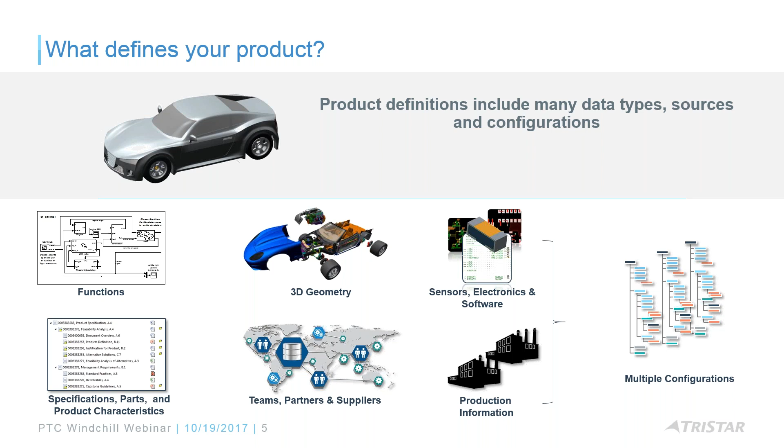So when we take a look at products, they may have also multiple configurations. A lot of companies want to design anywhere, manufacture anywhere, just to control costs, to control supply chain, and even time to market or just-in-time manufacturing. So keeping track of all this data, even in a globalized or dispersed environment, is becoming a challenge for a lot of companies. So a PDM would give you the ability to centralize the engineering data, but what about everything else within the company? There's sometimes no connection to any of that.

And who interacts with products, right? So typically it starts off with the upfront sales, quoting, and then gets more marketing, and then it gets passed down to engineering. And then other departments during that product development may need access to content that's being developed. Even the dispersed engineering organization with the various departmental stakeholders like quality, manufacturing, sourcing, and so on. So we're going to take a look at how PLM can help with supporting a lot of these different departmental stakeholders.

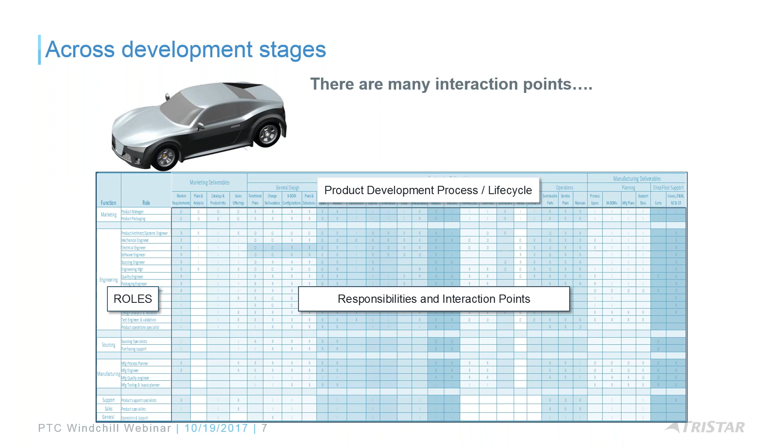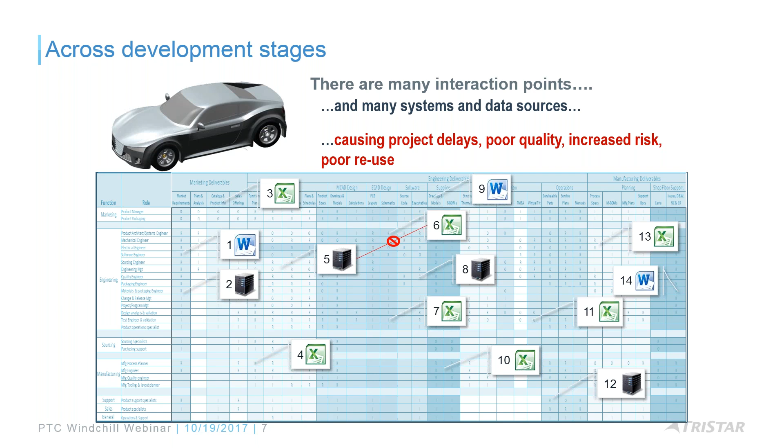There are many interaction points, many data sources that are then created. So each of these stakeholders typically may have their own database, their own work, and when a change comes, you need to examine that change, respond to the change, and incorporate that change into the product, or provide feedback back to the customer. Their disconnected systems ultimately cause project delays or poor quality or increased risk for meeting deadlines, and even poor reuse of existing data. There may be departments that already are aware of this issue, but it may never get back to that product design group in engineering, or it may not get in time to manufacturing, or even procurement.

One of the benefits of PLM is, because you're already creating a digital product definition in PDM or in your design software, the ability to enable universal data access to that information. That can happen in one system, but what data is being served? If it's just on a PDM, you're just serving the CAD drawing, the CAD part. That's pretty much it, maybe a limited view of the BOM.

And then everyone starts coming back to engineering asking for more information. So engineering is spending a lot of time being reactive to requests. If there could be a self-serve environment, engineering can spend more time on the design process, improving the design, cost optimizations, product improvements, and so on.

So at the end of the day, when I'm looking at a complete product, that consists of a bill of material, or what makes up that product, as well as the related information to each of those parts within that bill of material, or even the project itself. So things that may not come from engineering, like the quantities in inventory, or quantities that need on order.

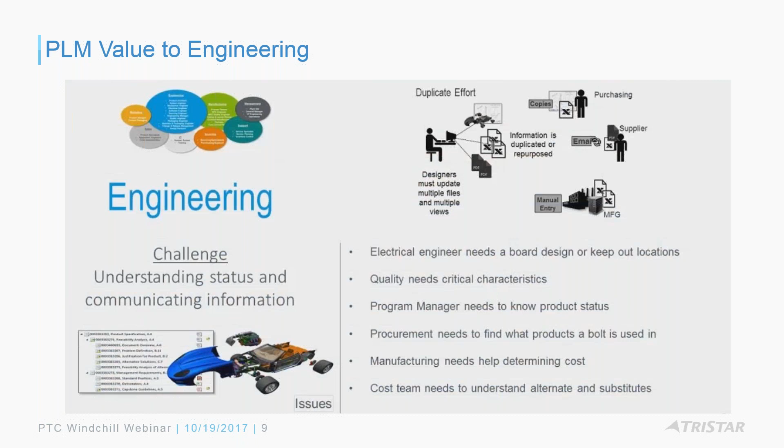So as an example, there have been industry studies that have shown that typically engineers spend about 20 to 30% of their time answering requests for others, providing drawings, providing PDFs, providing models, providing information, taking measurements for people, looking at what is the latest or the version of that model that was sent to that customer.

And if you just take an average of, let's say, 25% of an average engineer's time, and based on some standard salary.com calculations, if a company has 30 full-time engineers, if you can eliminate that time, or even half of that time, you can allocate that budget to other purposes, all those savings, and there are other improvements that could be a result of those savings.

So that's a direct saving based on productivity, but there may be other improvements for reduction in that cost, for offering more products, being able to take on more projects, being more responsive to customers, and so on.

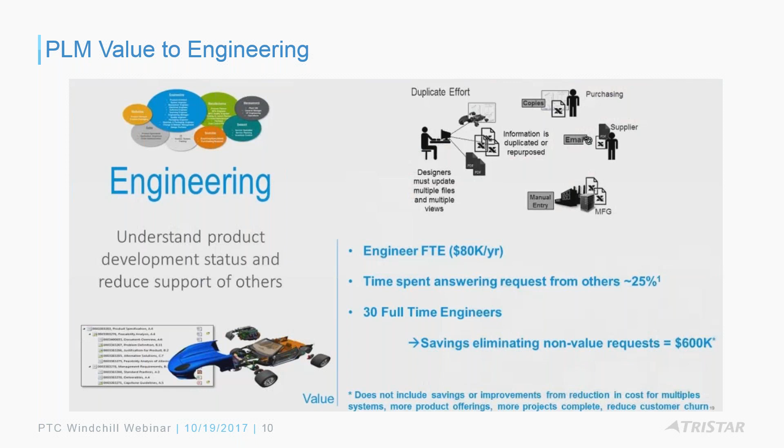For the manufacturing organization, a lot of the challenges are just getting up-to-date information from engineering, being able for manufacturing to operate in parallel to design instead of always in serial.

Typically, the process is that engineering has to get the design to a certain state before it's ready to be released to manufacturing, and then manufacturing starts taking it over and taking that design into production. If there are any changes that need to happen once it gets into production, those changes are very costly compared to being caught earlier in the process.

So giving manufacturing visibility earlier in the product design process is a great benefit. If they can access the system and see things that have been pre-approved for manufacturing, you don't need to release the whole BOM. You can just release portions of it if there are sub-modules or longer lead time parts that need longer manufacturing lead time for part preparation, fixture designs, part setup, and allocating work centers and resources.

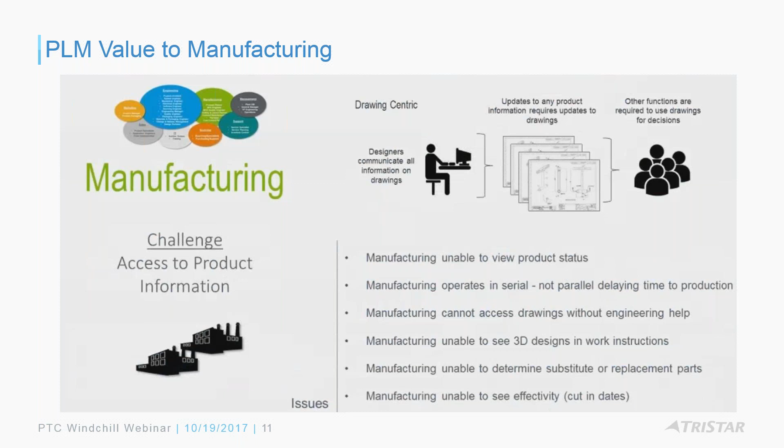So, one example is a design change. It's easier and less costly to catch a change in design than once it goes into prototype or even after into production. As an example from PTC, Ricoh copiers reported that a change during the design phase was only about $35, while prototyping and production costs ballooned greatly - obviously material scrap, rework costs, redesigning the molds, and if you're outsourcing, that has great costs too.

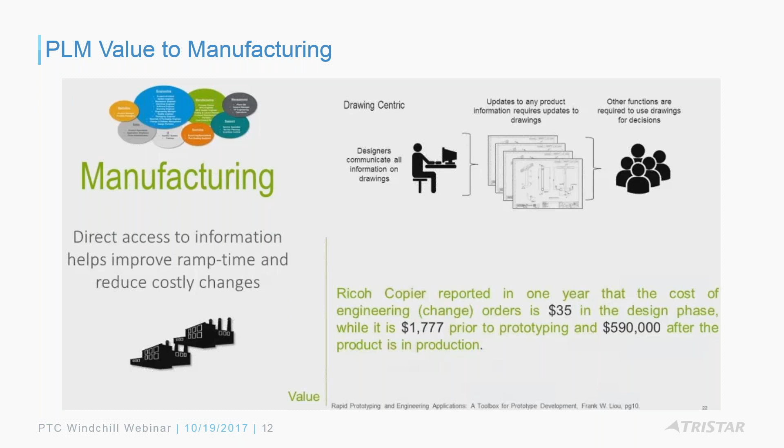What would be the value of PLM to the sourcing or procurement department? Typically, whenever I talk to companies, sourcing always wants early visibility into product designs, especially to determine those longer lead items for purchasing. They also don't want to carry a lot of inventory - if they order too many parts and need to ship them back to vendors, sometimes they're charged penalties for that and incur shipping costs.

So how can we minimize that and give sourcing visibility into pre-released content for a design? On the PDM side, they can see the parts, but they don't have visibility into all of the consumables, all of the parts that make up a full bill of material until that design BOM gets pushed into ERP and finished. So that again causes delays.

They always need step files or part models, and a lot of times engineering is just responding to those requests. Often those parts are sent by email internally within the company, and that could lead to mistakes.

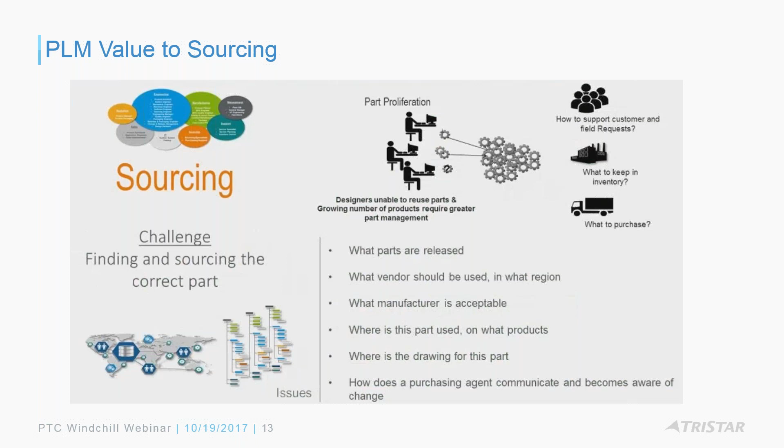So for example, a typical savings in carrying costs for parts, depending on how many parts are being managed, could come from a reduction in the introduction of new parts. Even if engineering needs to see what's already in sourcing - what parts we already have that we can reuse instead of designing a brand new part - getting engineering visibility into what exists in inventory and in the sourcing system would be a big benefit to reduce the amount of duplicate parts created within companies.

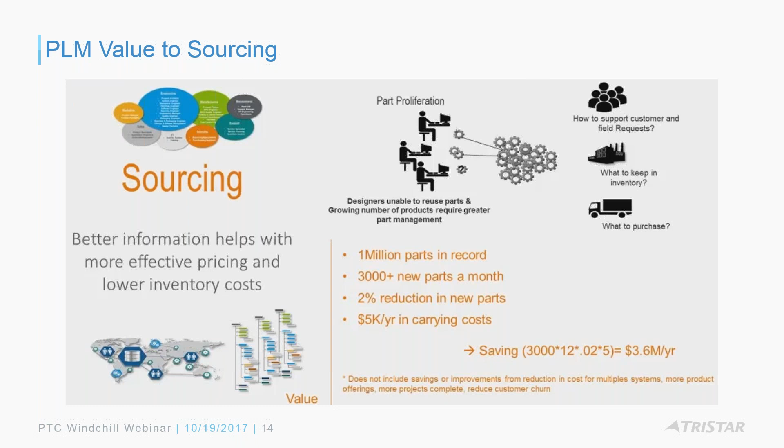In terms of project management or management in general, they always need to know project statuses - what are the statuses of deliverables from the engineering department, documents, CAD models, drawings? How does this impact customer delivery dates? What is the impact on the cost of the product, of the BOM, of the internal costs? How can we manage our projects, load balance, and prioritize our internal work and resources on those projects?

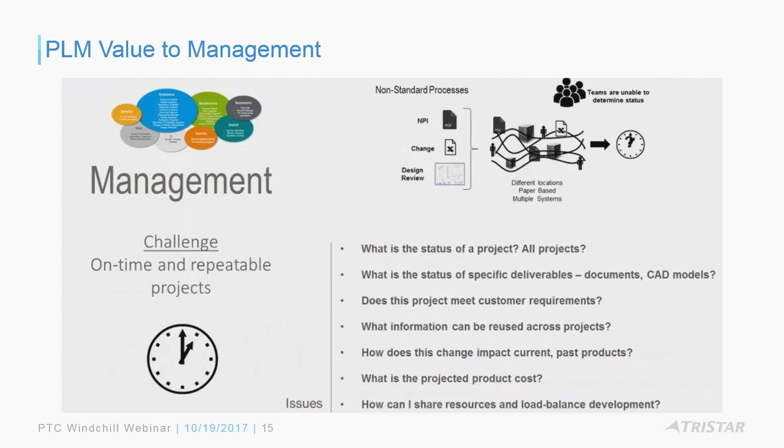So if they can have a system, PLM enables them to log in and have things like dashboards on project status, amount of drawings released versus unreleased, the status of work, the status of changes on that product, whether they're customer or supplier changes, and what's impacting and what's holding up that product, and be able to get those metrics that allow them to better estimate and provide information back to their customers.

If they can just reduce that amount of time that they wait for information by, for example, 20%, they can return some of that cost spent on the project and either increase revenue or be able to handle more projects.

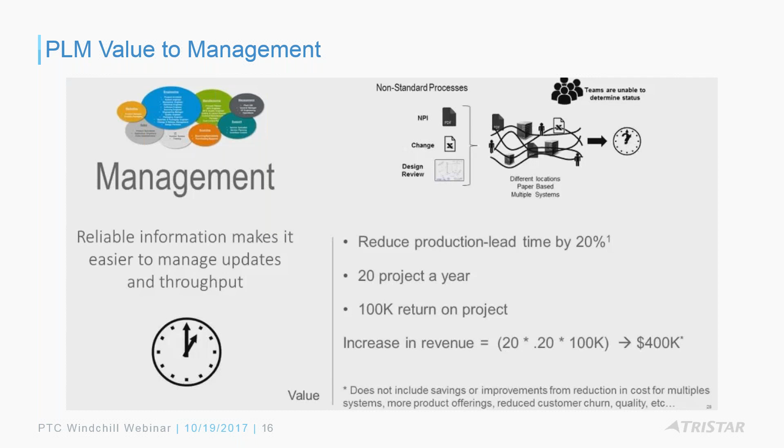And the value to IT, obviously, if you are maintaining multiple systems that do different things for product development, what is the cost of maintaining all of those? What is the cost of integrating those systems together? Some companies developed integrations between their various systems, so they have a lot of support costs for maintaining those integrations.

TriStar and PLM, especially in Windchill, allows you to reduce the reliance on maintaining custom integrations. We can handle that for you. We can develop an integration, and if the system needs to be upgraded, we could be responsible for making sure that integration works within, for example, Windchill or ERP.

So that kind of reduces the risk to the customer, reduces the amount of costs involved in maintaining those, as well as the amount of costs involved in the different licenses that they have to maintain, and the different databases and operating systems and database servers that they need to track within the company.

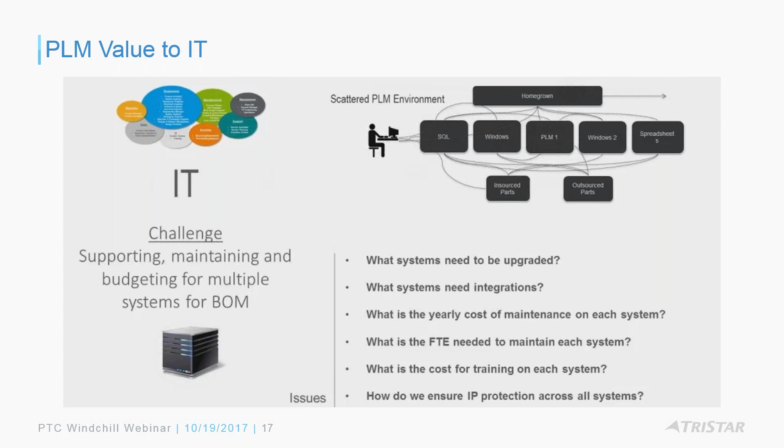So if we take a look at the calculation of how much that costs versus the number of users and so on, and the number of systems that IT needs to maintain, centralizing everything in PLM could potentially reduce costs in hardware, in the number of extra licenses, and these system integrations as well.

So the other typical benefits of PLM systems in general - these are industry calculated efficiency improvements, not only for Windchill, but PLM in general - are for the different value drivers: being able to see improvements in the engineering change side, the engineering change orders, engineering change notices, being able to respond to those in a quicker manner, being able to decrease meeting times, travel expenses for getting everyone on the same page, and being able to reduce the general and administrative costs for IT support, data proliferation, and so on.

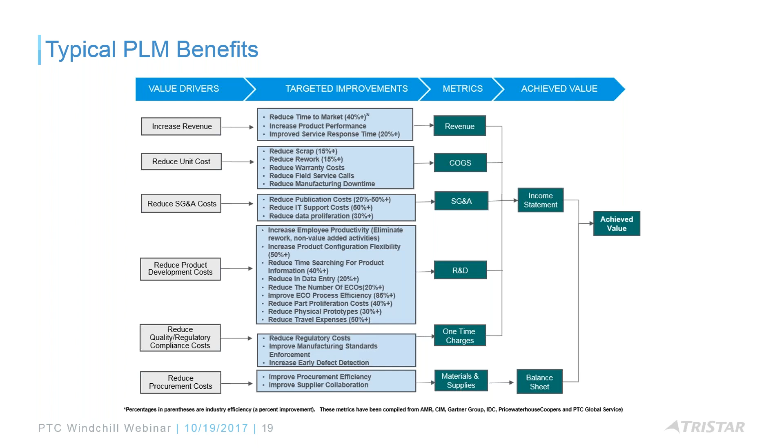So how can TriStar help companies on this journey? TriStar is typically the company that will go into our customers and make sure their PLM system and their installations are working efficiently. Even our competitors don't have the amount of breadth and expertise that our consultants can bring to make sure that customer is successful with their system and they're achieving some type of ROI or value from their investment.

Typical ROIs are anywhere from 6 months to 2 years, depending on the company. And for example, if you take a look at this slide, TriStar has expertise in either new installations as well as migrations from existing systems. We can also bring our expertise in configuring these systems for best practices and operational efficiencies, and even interactions with other systems, either ERP or CRM systems.

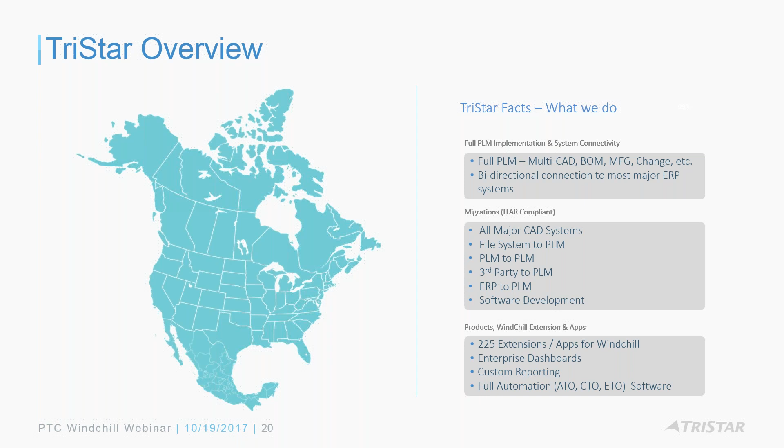So I just want to take some questions, if there's any, based on this overview. Just also to note, if you have any questions of the Windchill system itself, there are prior webinars that go into the various areas like BOM management, manufacturing, and sourcing management, and those PLM specific functions that Windchill and TriStar can offer.